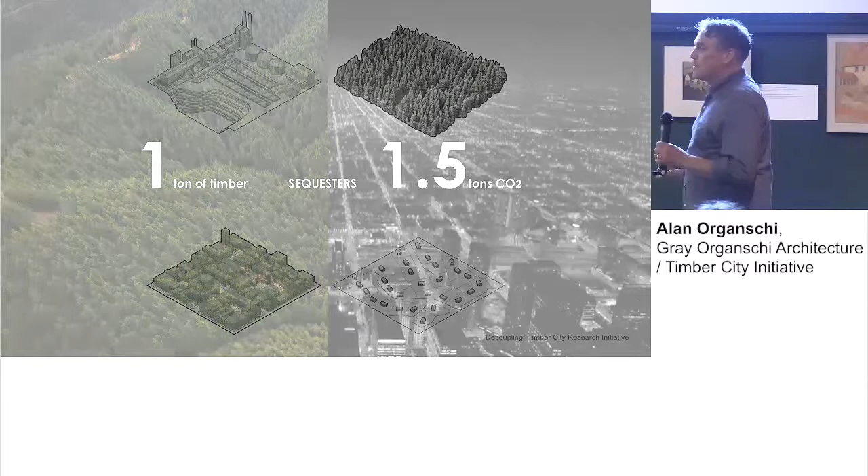What I'm interested in is the potential synergy between two landscapes which have previously been considered in conflict, the city and the forest. And the thing to remember is that forests hold carbon and cities emit carbon. And so the question is, is there some way to game forest growth, sustainable harvest, to produce cities made of wood? And moreover, to try to disconnect from a building technological and industrial perspective two landscapes which are linked.

The mineral extractive landscape, which produces steel and concrete, is linked to very efficient footprints, urban aggregations, urban building morphologies. And the forest, unfortunately, despite its incredible rich material range, is linked to a low-rise, low structural demand, suburban morphology. So how do we break that?

And what I'd like to propose is that we break it through regenerative architecture, and in particular, a regionally regenerative architecture which cuts down on potential transport costs, which uses the feedback mechanisms of people living in forests or near forests to know if they're being over-harvested, potentially deforested. We've lost that connection. We talked a lot about that today at the World Circular Economy Forum, how people aren't paying enough attention to their natural surroundings, or I guess disturbed natural surroundings, which is most of the world.

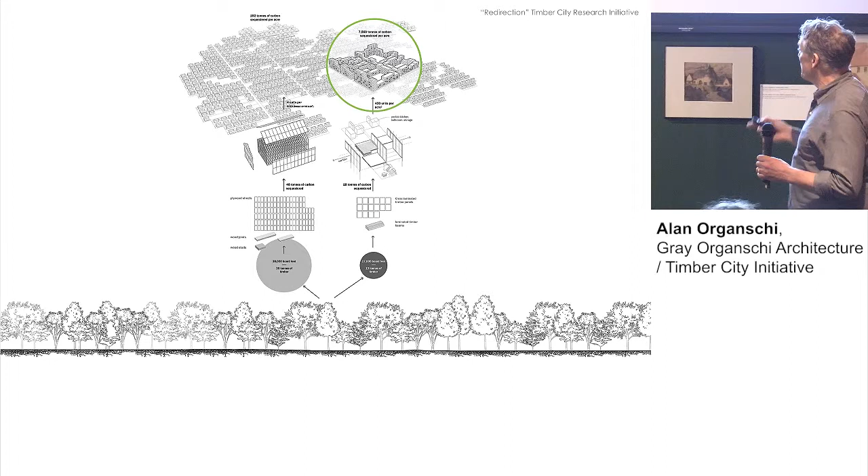So the question really today is, how do we move from this low-rise suburban morphology, which is in America, suburbia, and it's one of America's greatest exports, or at least most durable exports around the world. We build suburban morphologies. How do we shift that material into new forms of building, which the Europeans have adopted much earlier than the Americans and the Canadians, but we're trying to catch up, and to produce high-density timber morphologies. And so I want to run this through because there's concerns about how much wood we have in the world and whether we can actually build global cities and why we would do that.

And so we ran a little kind of scenario where we took a forest stand, and we planned to do a sustainable harvest, and we planned to build out a city, a 4-block district in a city that I live in, New Haven, Connecticut. And you'll notice the comparative carbon content. And we basically ran this scenario where we made 60 plots. We cut 45, one a year, to build out the buildings based on the growth plan of the city. And we studied also the stem succession regrowth of each plot, and we calculated actually how much material was needed, and it was proved that actually the plots basically regrew, and we left quite a bit in reserve.

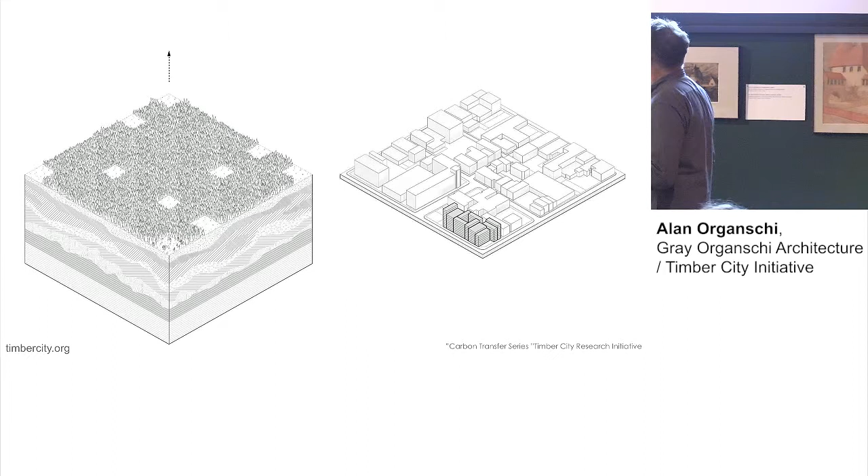And we started calculating how much carbon was actually moved out of the city. It started with how much was preserved in the forests that we didn't cut, how much was reabsorbed through the regrowth of the forests we did harvest, how much was sequestered in the buildings, and most importantly, how much was avoided when we didn't build with steel and concrete, which would have been the conventional building material for that neighborhood.

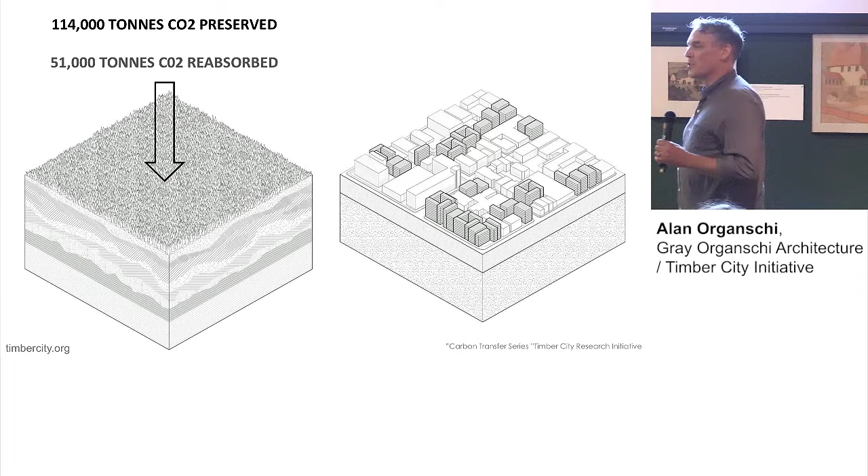And so we ended up with a total carbon bank of about 282,000 tons of CO2, which is equivalent to about 64,000 annual emissions of vehicles. And if you start calculating the current value of a ton of carbon, it's probably worth several million dollars. If you listen to Bill Nordhaus, a Nobel economist who described the potential for a carbon taxation scheme, he feels that by 2100, a ton of carbon will be worth something like $1,000.

So I'm not going to do the math for you, but suddenly we start thinking about carbon as an economic currency, and that forest is a driver of that and incentivized to grow and be protected and restored and expanded, afforested. And so that was my long-winded way of starting my lecture, The Carbon Positive City.

And so for those of you who are worried about global deforestation, I ask you to think about the fact that it actually may be a way to harvest silviculturally a lot of the forests that should be cut, obviously protecting those very biodiverse, at-risk forests in certain parts of the southern hemisphere. And in the US, for example, at 1500 AD, half of the country was covered with forests. Today, we've removed a bit of it, and we're down to 33%.

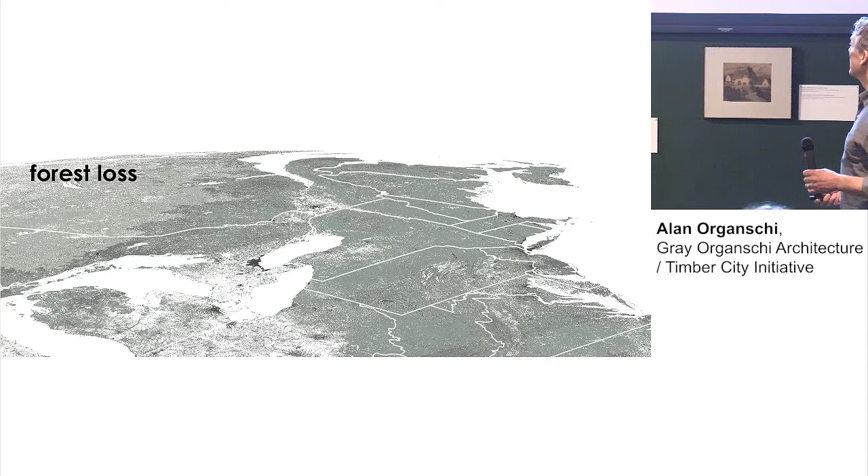But we should also start any discussion of using timber for building global cities, which will expand inevitably, by talking about what the real forces of deforestation are today. Agricultural conversion. We eat a lot of meat, unfortunately, and we need lots of pasture land. And we mine for lots of things, lots of metals. We overuse metals, actually. We know this from our circular economy friends at the Finlandia Hall. And just building itself uses a lot of forest.

And of course, climate change itself has wreaked havoc on American forests. You heard about the Camp Fire in California last year, which destroyed huge amounts of forest and released enormous amounts of carbon dioxide. But this isn't really deforestation, because you can cut forests and they regrow. But this is what happens when you strip the soils, which have quite a bit of carbon in them. In fact, in the temperate forests, about 50% of carbon in the forest is below ground. And so when you strip those valuable carbon-laden topsoils away, you get an irremediable landscape.

And we're running out of resources. We're talking about this at Finlandia Hall during the World Circular Economy Forum. We're spawning criminal syndicates that dredge illegally and collapse habitats in Southeast Asia to provide the demand for sand for concrete in India and China. And we accumulate waste, which is a problem in itself because a lot of it doesn't biodegrade, but we also remove valuable productive biomass by covering it with this, and we also cover it with other things, like cities. And we lose the value of those soils.

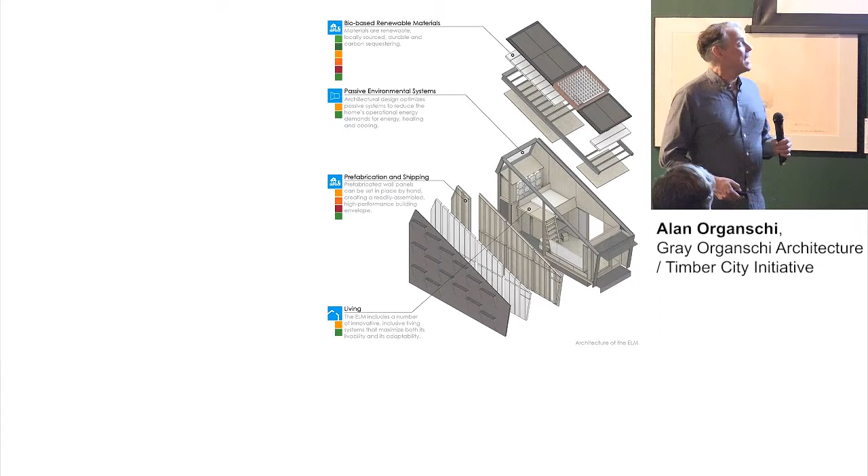Anyway, we followed all the SDGs, the Sustainable Development Goals of the UN Environment Program and Habitat, and we basically built a small building that could be trucked onto the UN Plaza. We learned later, after we'd already committed to this, that we weren't allowed to take a truck onto the UN Plaza, so that got tricky.

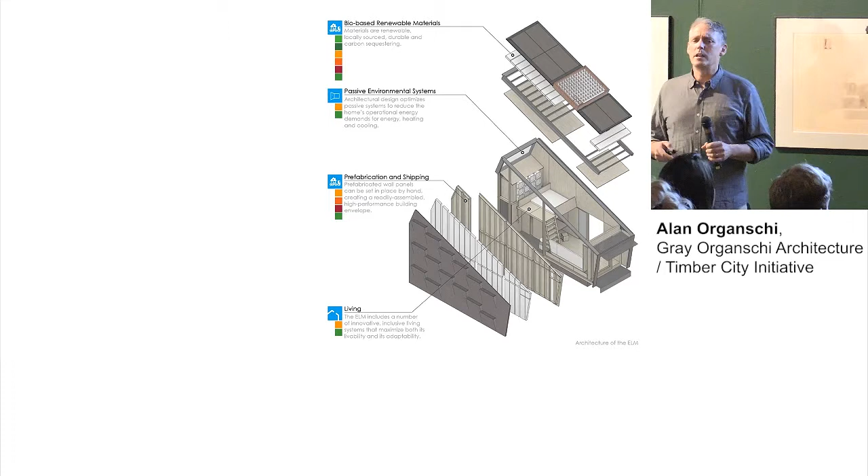But it was basically prefabricated in New Haven, and it basically housed a family of four for a peri-urban situation where there might be food insecurity, safety issues, power generation insecurity, no grids. And so we imagined that somehow it was a sort of post-apocalyptic New York. So we looked at the climate zone of New York and the material supply of New York, and we went to work.

So we basically designed for about 4 or 5 weeks, and we built for another 3 weeks. We sort of started, and in 3 days we moved it onto the UN Plaza. And I will never recover from that. Imagine taking a house, admittedly a small one, through airport security. That's kind of what it was like. My daughter, who supplied us with food, almost got arrested by the UN police.

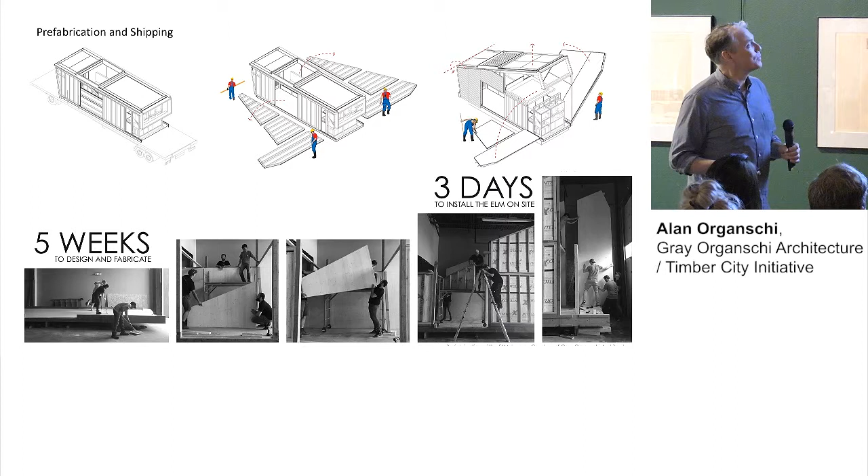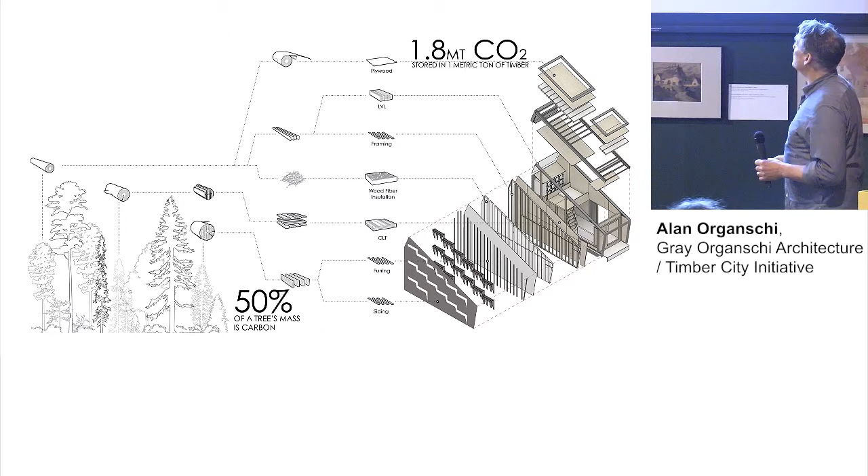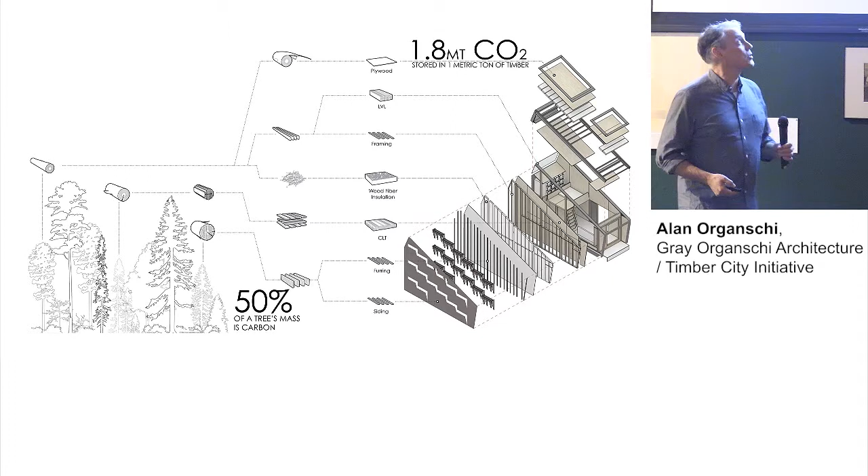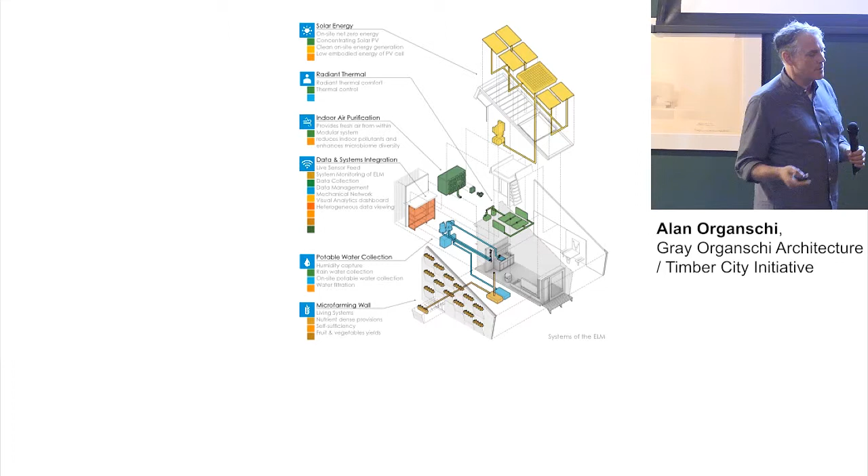And we looked at the carbon sequestration or storage of, which wasn't much, it's a small building, it's about 21 square meters. Really kind of one story with a loft. And we distributed the local material, and we looked at different systems: solar energy systems, solar generation, obviously, radiant thermal energy, indoor air purification, natural ventilation systems, potable water collection through condensation, but also through rainwater harvesting, and then finally a farming wall. And it was surprising to get it there.

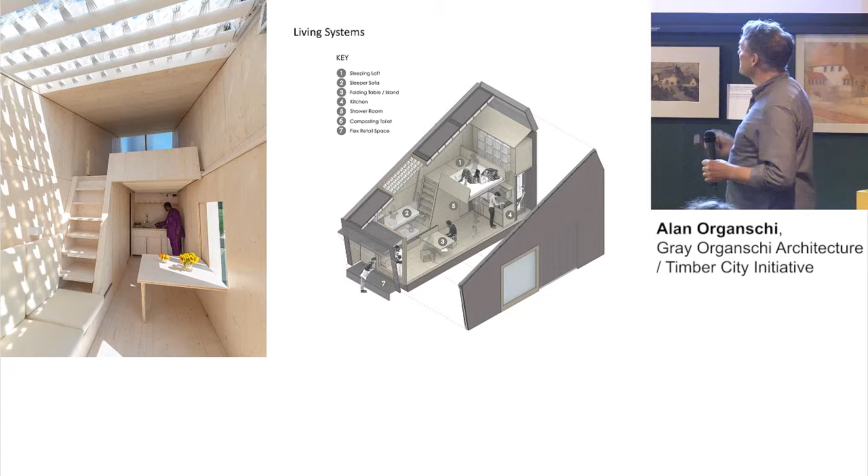I wouldn't say it's a work of craft, but it was an idea about working quickly with little time, trying to think on your feet, trying to make a decent building, a good home for somebody with a lot of options. Essentially, you can kind of see the layout, I hope, and I won't go into much detail. This is the head of the Kenyan UN Environment Program, who spent a lot of time with us. He was great, and he actually said that he wanted to move in, which was nice.

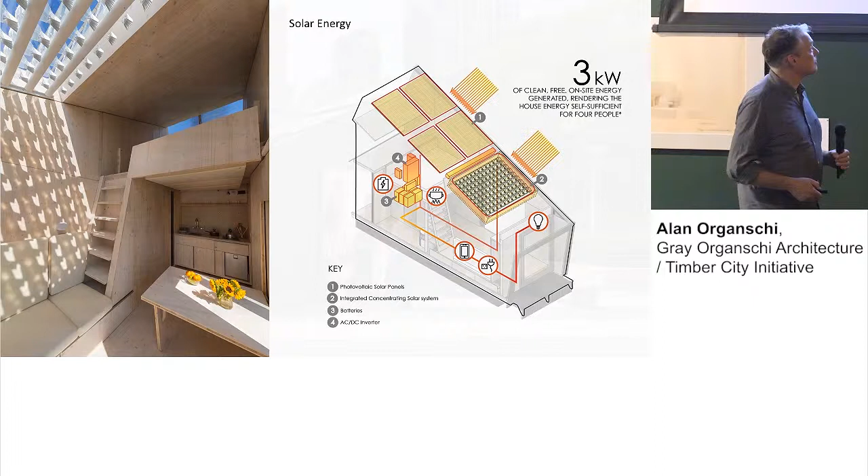And we also measured the air quality, and it turns out that wood has really high air quality once the initial VOCs have basically diffused. And this is our little mechanical room, which had 5 car batteries and could basically keep a family of 4 powered, enclosed in their house for 5 days, and produce enough water and enough electricity for that family to live, completely self-sustaining. And we used a lot of reused materials to make the sidings, and ran out and had to get new material. It was a rush.

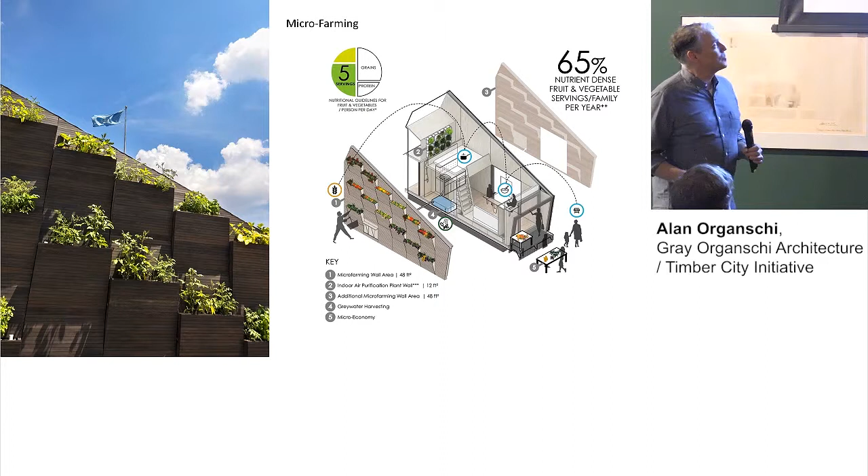And we had a team of people in my office, students. We worked with the Center for Ecosystems in Architecture to develop the systems, and we made the plant wall and grew plants in that for over 2 months, and basically produced a pretty decent amount of nutrients. And it was a hit, because people in New York don't expect to find a house on the UN Plaza, and they liked it a lot. And this is the Deputy Secretary of the UN tasting basil and eating tomatoes, not the green ones.

And so it was a good lesson in thinking more broadly about how buildings should perform, both how they operate and how they protect people and provide them with services, but also how they should use materials from this increasingly resource-deprived planet. And so we thought about scaling up. And in scaling up, I like to think of a sort of design spirit guide, Charles and Ray Eames. My partner Lisa Gray and I have worked together since we got out of graduate school, and we wish we could collaborate like Charles and Ray Eames, the great furniture designers and filmmakers.

And I love this piece of art. It's a laminated double curvature sculpture, which I would love to have on my wall and own, but can't afford now. But when we add to the aesthetic program of this beautiful piece of sculpture, and we learn that it was a leg splint designed for injured soldiers in the Second World War, it changes our view of what that aesthetic is. It makes it more, for me, meaningful. Kant called that contingent beauty. And I think the idea of contingent beauty is something that we're wrestling with a lot, because of course we want to make beautiful buildings, but we want to do no damage to the environment, and that's the goal.

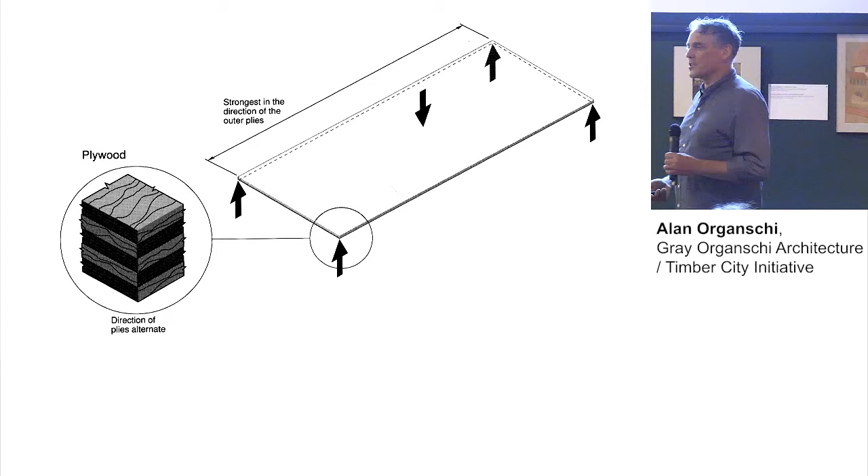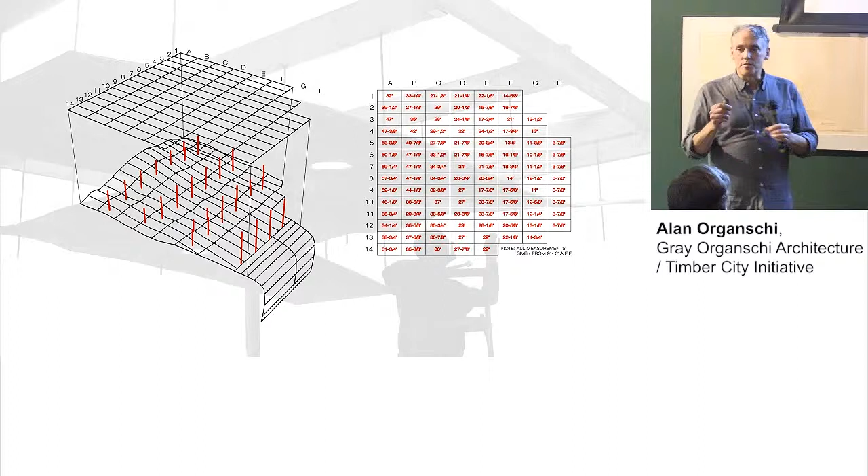And so we studied the idea of stiffness in a project, which we did in the late 90s, renovation of an old firehouse for an acoustical music studio. And we bought a bunch of plywood, and we tried to see how far we could bend it in 2 directions. How stiff would it be? And we created an acoustical shell, and we modeled it physically, testing it using different techniques of sort of tuned wood mock-ups. We measured it and gave it to a Swiss acoustical engineer who promptly wrote back and said, I can't model this, it's too complex.

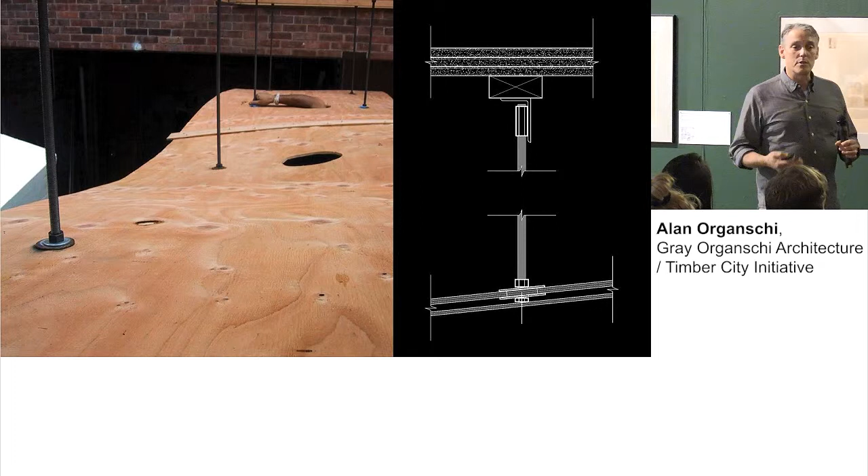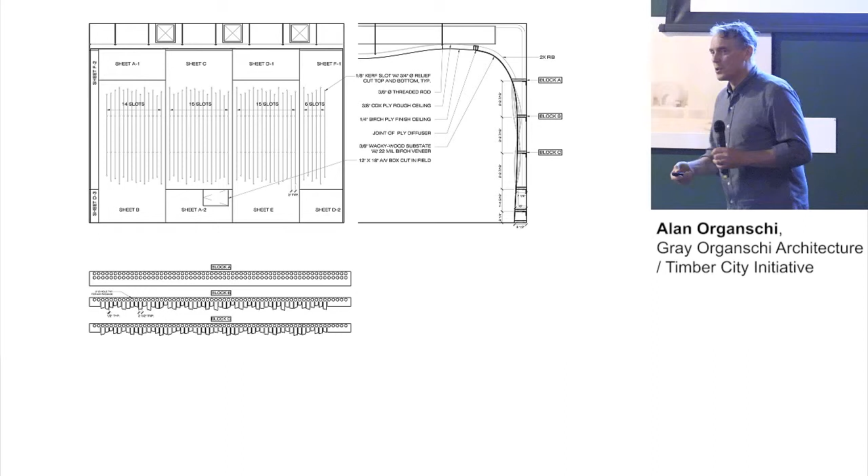And so we essentially used these different threaded rod systems to produce an acoustical shell that was acoustically dead for a recording studio and very live for performance, and that was a kind of complex design process. And we designed an acoustical diffuser at the stage to produce these sort of vanes which twisted and warped to diffuse sound for the musicians, and also to serve as an air return duct.

And we stole a little detail from one of Charles and Ray Eames' furniture patterns, which was this relieving cut where we cut a circle out of the end of a kerf cut, saw cut, because we found that when we were warping that, it split. But when we could expand the tensile area around a larger surface area, it wouldn't split. And that became a kind of motif.

And the room seats about 70 people, and a crush, and the piano you can hear. It's incredible how live, how rich wood is, and we know it's a great instrument material. And here was a big room that was an instrument. You can hear the hammers on the piano coming down before it hits the string.

And it's so incredible. And we were renovating this firehouse, which had been abandoned, and we were able to, through the brilliance of our client, Nick Lloyd, who runs a record label there, produce essentially a home for himself and his wife, who's a painter, and then their children, and a bar in the basement, and the recording studio, and the record label, and visiting musicians started coming, and it was really successful because of his vision. And he lived in this amazing sort of relic of 19th century New Haven industrial space.

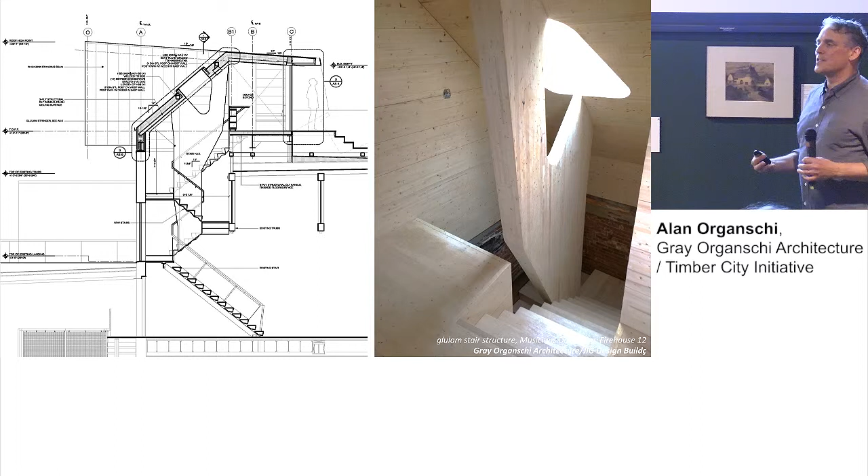And he asked us, once he decided that he was going to house visiting musicians instead of making them pay exorbitant hotel prices in New Haven while they were visiting, to build a dormitory with 3 bedrooms on top of the building. And we quickly found out that the building couldn't support it, because it was an unreinforced masonry building. And so we chose to use mass timber, cross-laminated timber and glulam, to stiffen the building with a light structural material that would essentially keep the building up under the load that it held.

So we have a stairway up into a hallway with a little seating area for musicians to play, 3 bedrooms and a little bathroom and a WC. And it's sort of created this new urban lawn on the roofs, and it's created more density. And the real discovery was we could plop this building down on top of an unreinforced brick building built 100 years earlier.

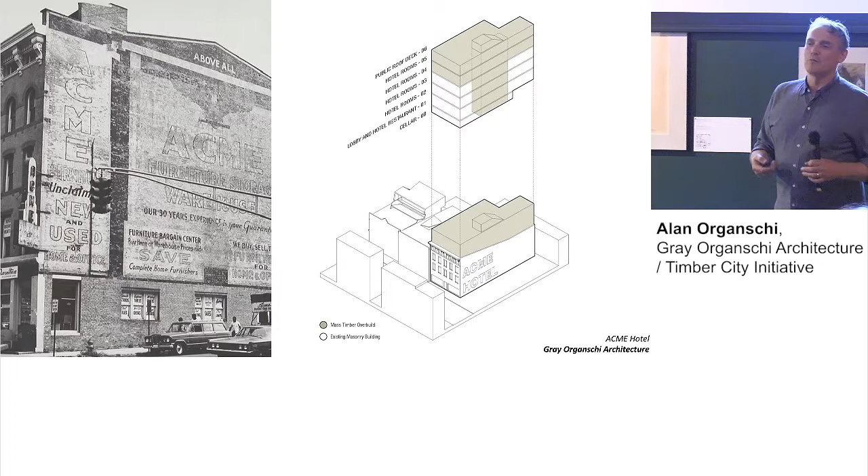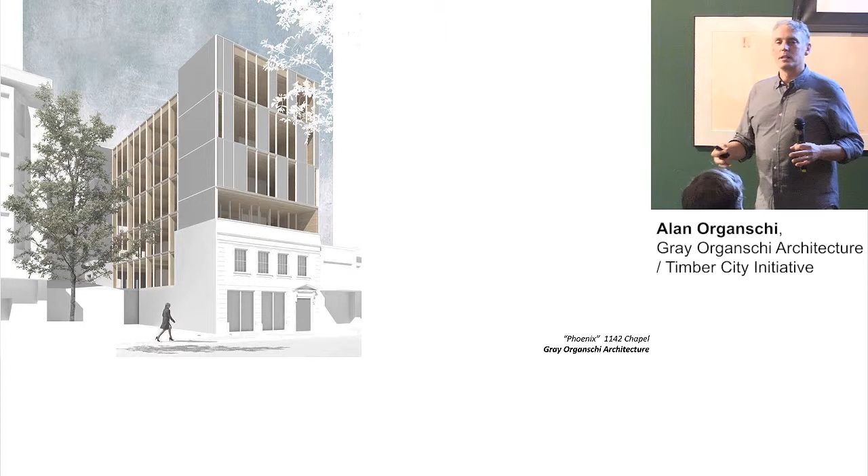And so a developer contacted us and said, I want to add 2 stories to the other building next door. And we designed a sort of restraining system using cross-laminated timber cores to produce a hotel 2 buildings down. And then another developer called us and we designed another building, and I won't go into the details, but suddenly the city economic development coordinator was saying, oh my God, we can actually get more density in our city using wood because we can't do it with steel, it's too heavy, or concrete. So this is a great model, and we'd like to pursue it.

And that brought us to a kind of idea about this notion of structural biomass. Like, why aren't we using this great plant material that's so abundant and so photosynthetically productive? It provides so many ecosystem services. Why aren't we using it for our buildings? Because we know that it will regrow, it will regenerate. We've been talking about renewable materials for 60 years. And so we began to study different scales of using just round wood to produce structure.

And that reminds me of a kind of funny story. We were having dinner with the rector, and we had a really nice bottle of wine while we were talking about the design. And another visitor who was a lay person, after this sumptuous meal, said, man, if you guys do celibacy like you do poverty, sign me up.

Anyway, the building is a lot of wood. We designed it as a wood structure. The university that sponsored the building decided that it wanted to do a LEED platinum building, and we learned that you get more credits for recycled steel, despite the enormous smelting energies that go into steel recycling, than you do for a wood structure, because wood was essentially politically knocked out of LEED for quite a while. Recently it's been reintegrated through a material credit. And so we made a steel building and we used as much wood as we could.

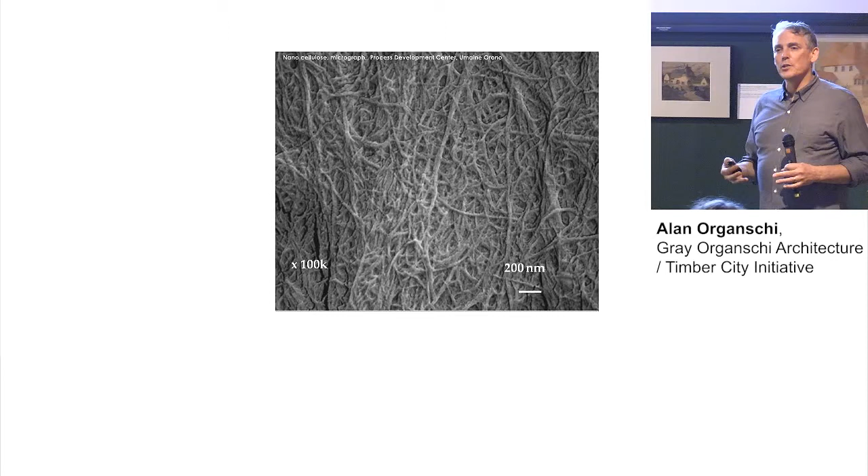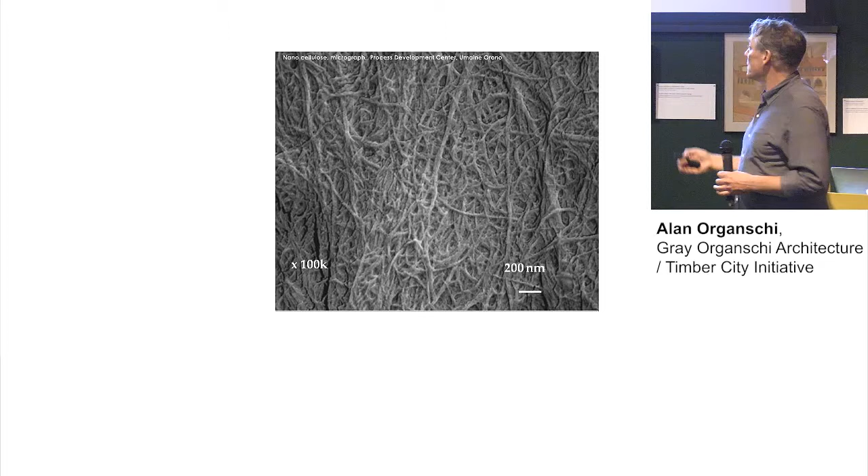And we went to work thinking about all of the different things that are going on around the world, inventions, the sort of revolution in bio-based materials, biogenic materials, which is happening right here in Helsinki at VTT, or across the Atlantic at the University of Maine in Orono, which found a way to mechanically produce nanocellulose and are pressing panels out of it, or the work by the folks at the TU in Munich on cellular nanostructural modification of cell walls using polymers and mineralization to create greater rot resistance and fire resistance and all these kinds of exciting things, and these different techniques of adhering wood. We're even starting to look at lignin-based glue so that we're not actually using fossil hydrocarbons to make glue.

And then Achim Menges' work at the Institute for Computational Design, where he's looking at the natural hygroscopicity, the water-loving character of wood, and how it can change to produce apertures activated by moisture changes. But I like the dumb stuff. I like the stuff that's ready at hand that we're making. We've been making glulam beams for a century. We've been making CLT for 25 years. Petra, you can correct me on that, but it's been decades, let's say, we've been doing this stuff.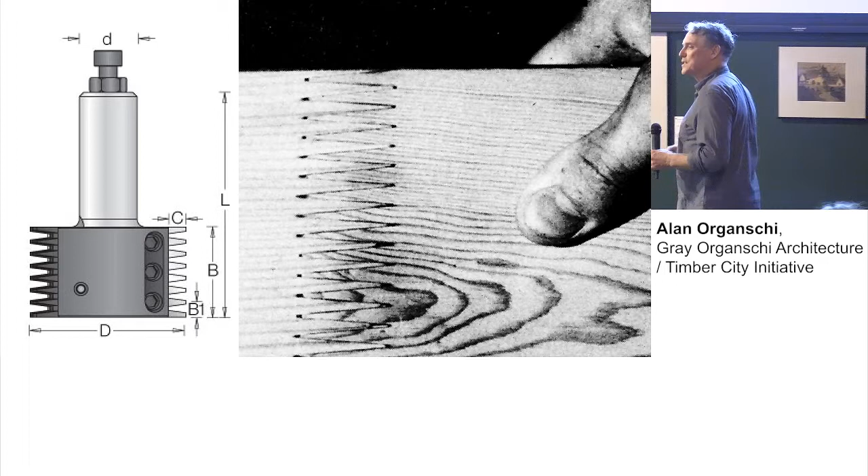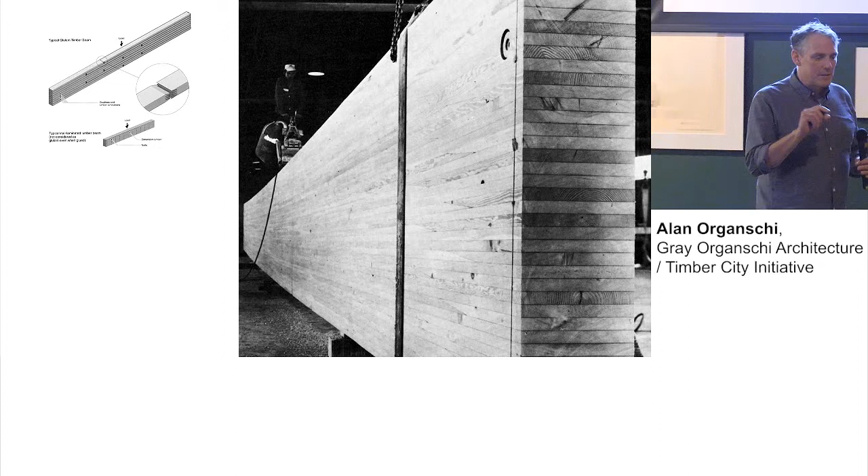And really the tool is a finger joiner to make long sticks and glue to laminate the sticks together to produce massive members with enormous capacity. And now we're only realizing that we can use them in the way we used heavy timber industrially in the 19th century. It's fire resistive. And it already knows how to manipulate the different quality of fiber that comes out of the forest by putting the best stuff along the structurally most demanding edge, the tension edge, the second best stuff along the compression edge in a beam, and then you can load the cheaper stuff in the middle, which means you're using more of the forest that you cut.

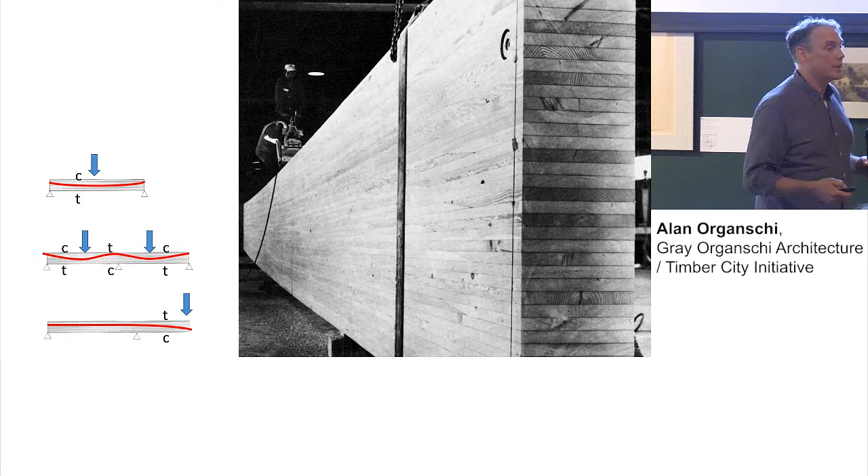And I think we haven't yet fully understood all of the potential of that capacity that we've been using for years, creating different kinds of structural configurations. And this is an example at Blumer Lehmann in Switzerland, a 5-story building where the architects and the manufacturing company recognized that they were using a lot of spruce, which is a wonderful structural wood, but there's a lot of beech growing in European forests, and so how could they use beech? And they made laminated veneer lumber, bearing plates, and laminated veneer beech dowels to produce a 5-story building that had no steel.

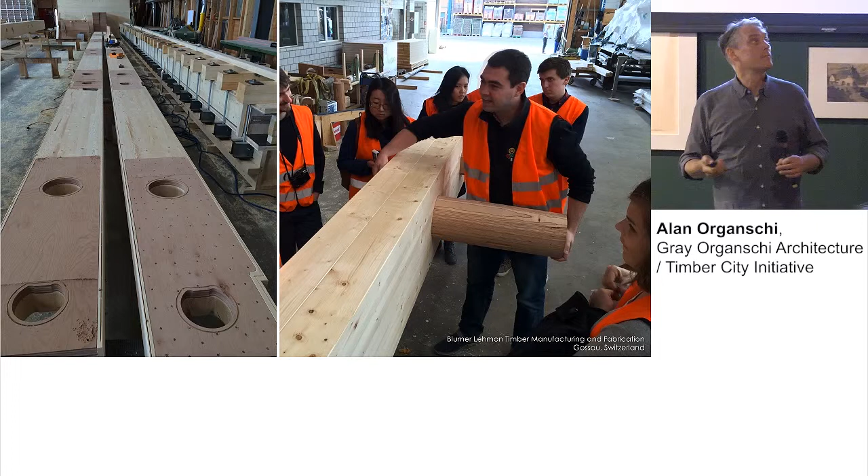And so we started making lots of buildings out of curvy glulams because we liked the shapes, and we made houses out of it, and I think our clients tolerated it. And we misunderstood certain kinds of things aesthetically because we liked the shape of this beam lying on the ground before it was put up.

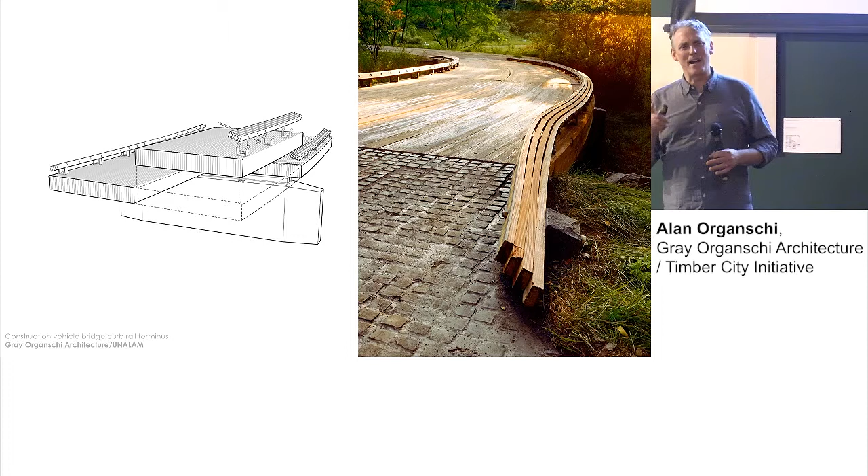And so we made a bridge out of it and sort of gained the capacity of the manufacturer to produce a construction bridge that is a 10-ton, US ton capacity bridge, which we watched a 30-ton truck drive over, which was very interesting. But what happened was it kind of sprung back into shape, and we thought, oh, wood actually is resilient structurally. And so we made a number of bridges.

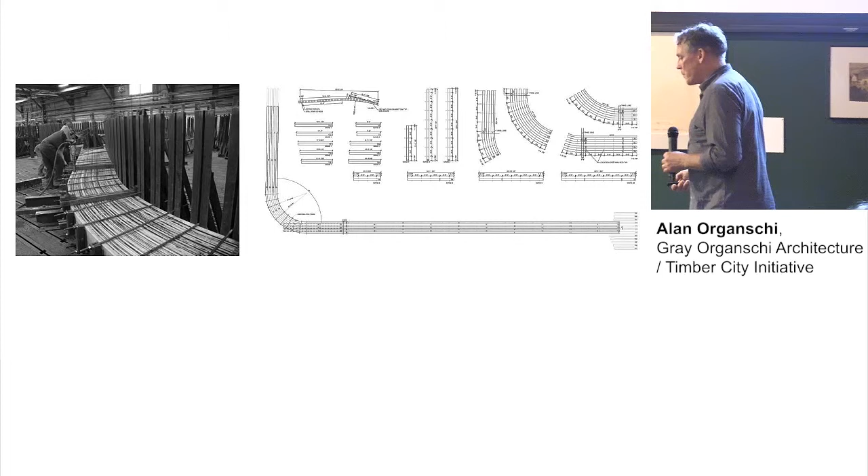And I'll move through this quickly. It's a kind of passion of ours. We get asked to make bridges because people think wood bridges should be in woods. It's the, I don't know, correlation that people seem to like. And we really worked with our partners as glue laminators to produce essentially treated bridge systems.

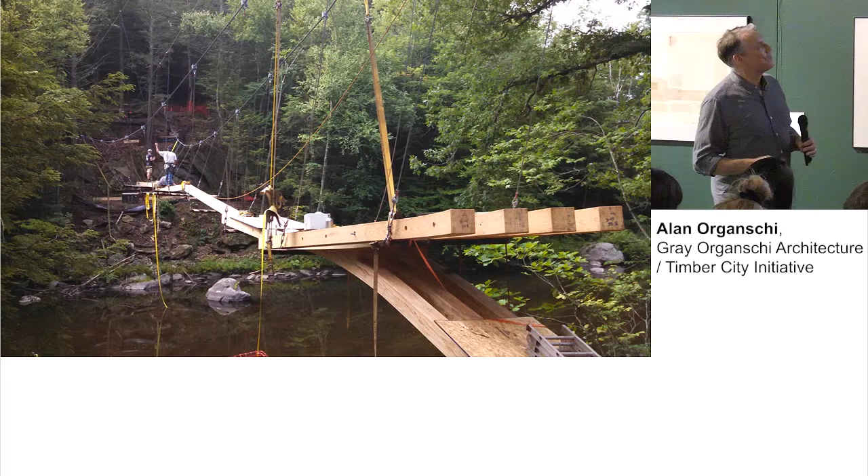And we made our first suspension bridge a few years ago, and it was a challenge. Our company, Jig Design Build, rigged it. We have one of the builders here in the audience. But we got it straightened out, and we made this bridge named after Henry David Thoreau, one of the pioneer environmentalists in the US. And people use it, and they love it, and I think they love it because it's not made of plastic like a number of the other bridges up and down the river.

And it's made of solid, thick material, which, because there are not a lot of little joints, it's more resilient. It lasts longer. It's more durable. So mass timber has a lot of possibilities.

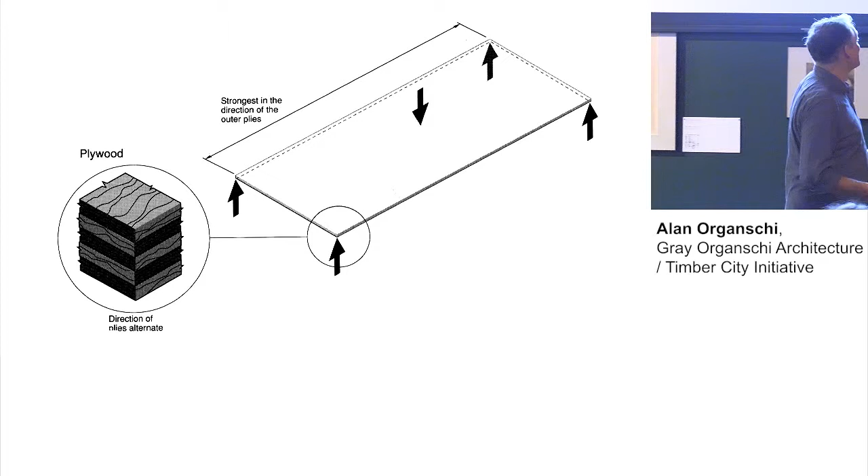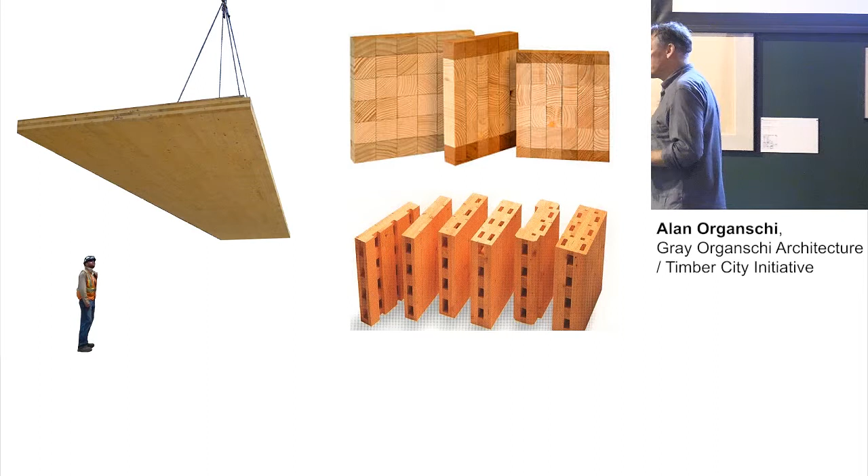And then, you know, the CLT revolution comes along, and the Americans figured it out, I don't know, like 18 months ago, it feels like. Meanwhile, Stora Enso and KLH and a lot of European manufacturers have perfected it and can still beat the pricing of American CLT manufacturers. And they just stole the idea of plywood, transverse lamination, and they produced it with sticks, as you all know. And you can produce all kinds of fascinating configurations. These slides are so outdated now, given what's available. I need to get on the stick and find some new pictures.

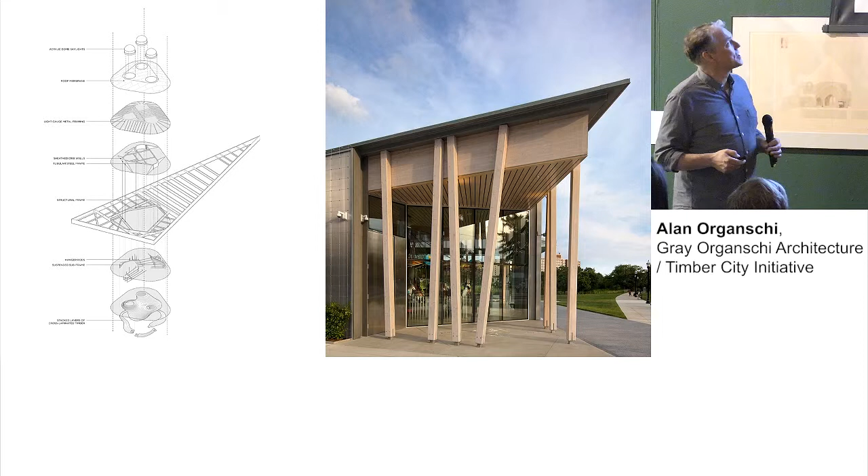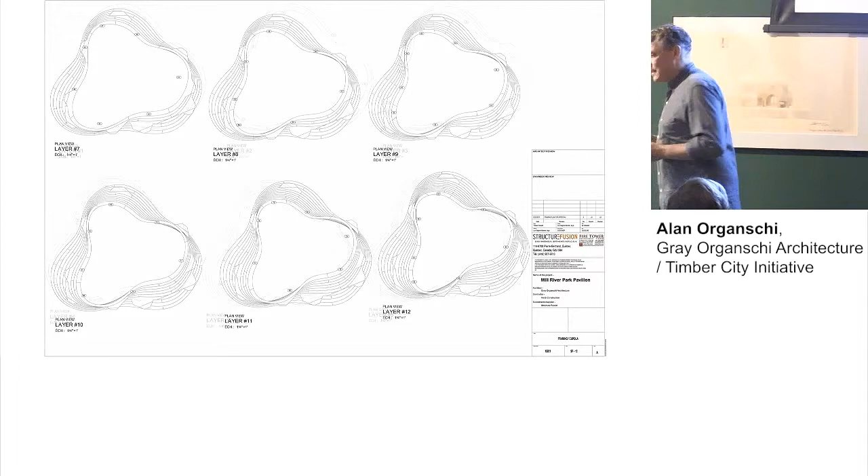And we had a great fabricator in Quebec who worked with some Belgian and Austrian and French fabricators to produce this cupola made out of a kind of topography of cross-laminated timber, which had 3 skylights and which sort of spun and rotated in the opposite direction of the merry-go-round. And it's the kind of thing that shows you that wood, because of the manufacturing capacities it allows, is so amenable to digital kinds of fabrication that it's easy to build something like that in a factory, off-site, ship it, and with a precision to be able to produce this in a matter of days.

A fabrication project done in a factory, but assembled by steel riggers, because the company Canam, which is the largest steel manufacturer in North America, has bought a timber fabrication company as a kind of climate change scenario, because they know that wood is going to be the thing of the future, and they know that their guys know how to lift really big pieces of material high in the air with cranes.

And so we made this and built this building, and it took a long time to convince anyone in the city of Stamford, Connecticut, which is a city of about 200,000 greater metro area, to build this for the kids. It's a public merry-go-round. It costs 25 cents to ride on, and they ride around, and I look up and I get a little seasick, but the kids seem to like it.

So here we are. We've been experimenting with making wood in the city in kind of little stabs. Meanwhile, our friends in Vancouver and Austria are building multi-story, huge buildings out of timber, and we're playing around with 1-story event spaces. But what was interesting to us as we watched the proliferation of wood architecture was the sort of molecular aspect of wood.

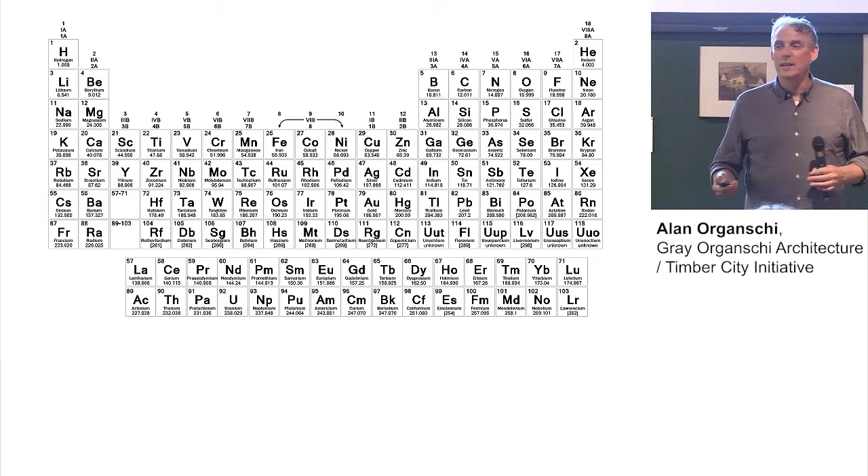And if you think about the throwaway culture of cell phones and you start applying it to building, it gets a little scary. So we could talk about all the buildings, all the materials that go into building, but I'd like to talk about carbon because that's the subject of my talk.

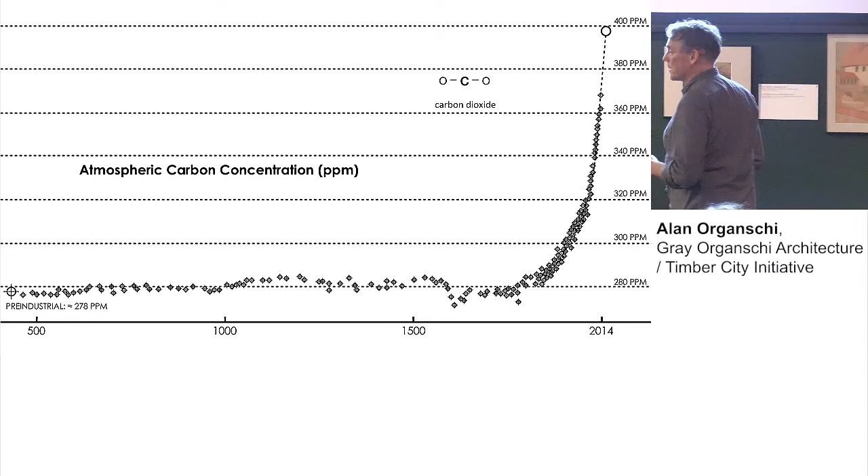And we've seen since the Industrial Revolution a sudden spike in carbon concentration. And not surprisingly, if you also map global population against carbon concentration, you'll see that it's coupled. And that's the thing that people in the industrial ecology world and environmental world are worried about, because that means that when we consume as a species, not just because we breathe, because we make a lot of stuff, we're makers, homo faber, we emit carbon. And that correlation is very strong.

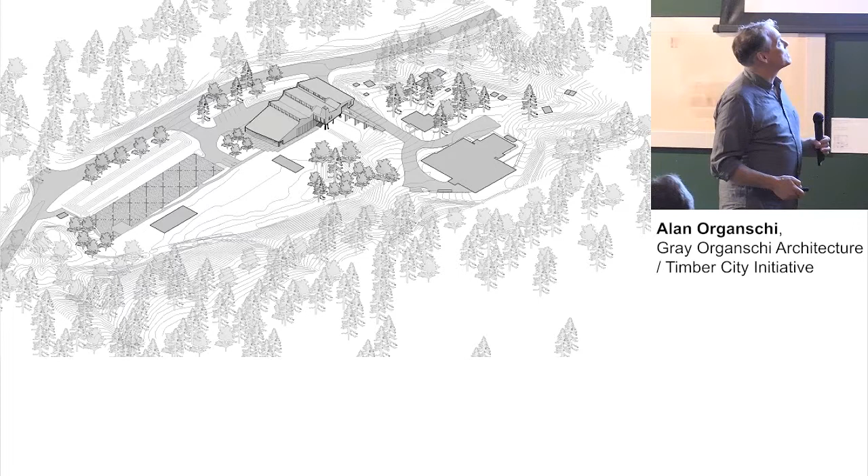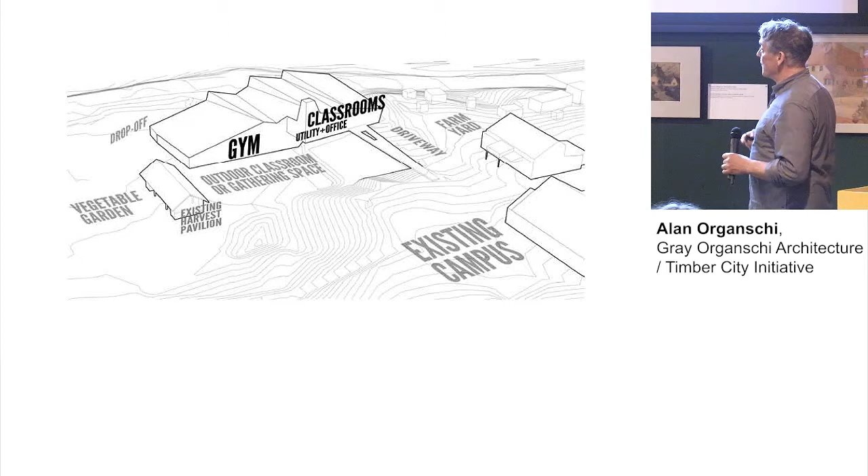And so we designed a classroom building which had a gym. They could only afford a half gym, art classrooms, 2 science classrooms, offices, and that it would create a new space of entry for the school because they were perched on a hillside. And so we used the building to navigate that sectional change.

And it's fairly simple. I won't go into too much detail, but just to give you a little reference, the building has this half basketball court, which also serves as a gymnasium and a rec space and a theater. And then most of the offices and bathrooms are downstairs, and then upstairs are classrooms, which each look into different areas.

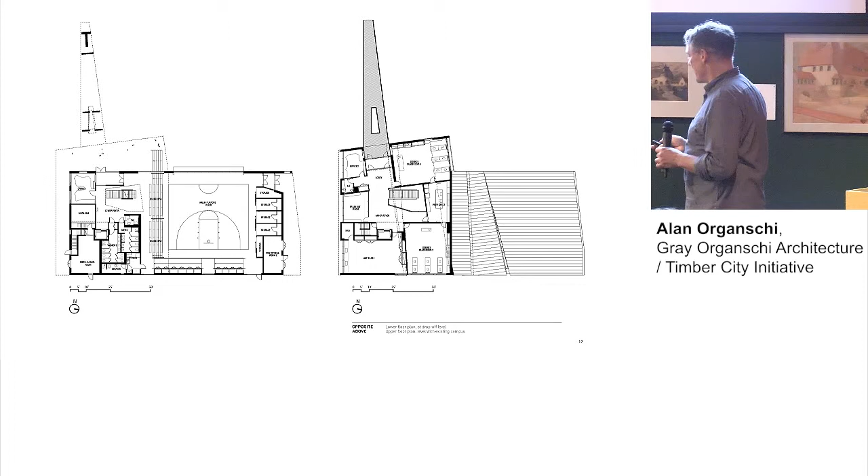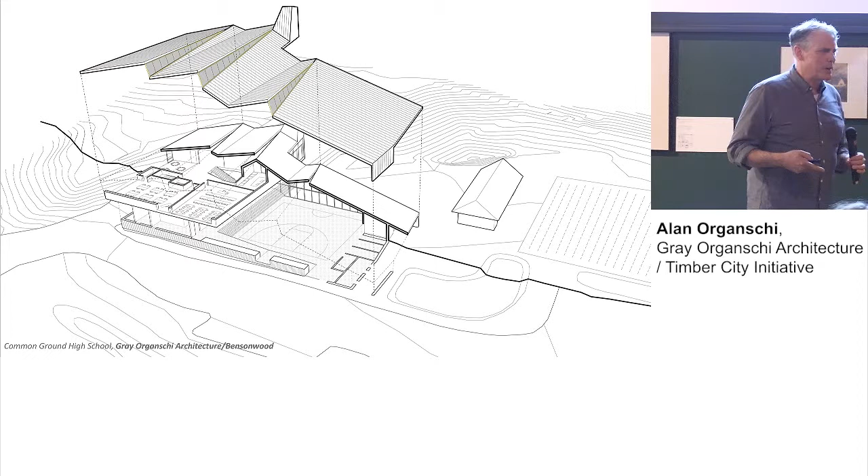And we decided that we're going to throw everything at this building. The roof was going to become a really important element in the building. It was going to allow, obviously, natural daylight to reduce electrical illumination costs. It was going to be super, super insulated and airtight so that we could optimize our thermal performance. We lined it on the south. The roof pitches optimize the angle for solar photovoltaic arrays, which would power the geothermal pumps that ran the school.

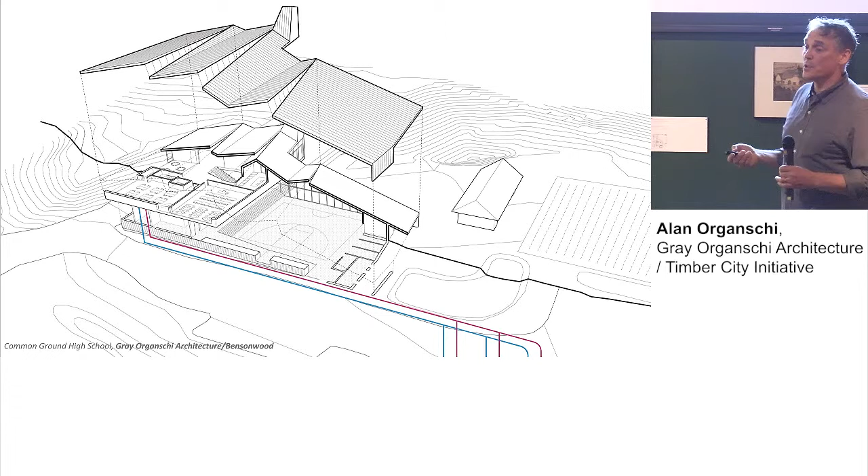I mean, it's really hard. American school systems are a wreck. So the idea that a public charter school could get the bond issued to produce the school was a big deal, and it was really a tribute to the administrative team. They were incredible, and we've got all this stuff in there, and we developed bioremediation pools and artificial wetlands, which became outdoor classrooms.

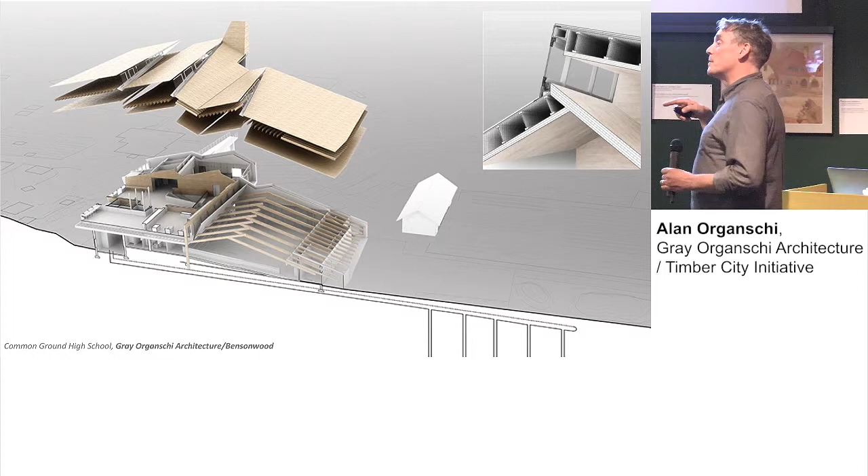But we argued that the thing that would be the most beneficial was to use regionally harvested wood to build the building and to use it as densely as possible and to use these new technologies that would allow the structure to be the finish as well as the structure, that we wouldn't have to cover it up.

And so we looked at black spruce from Canada, not too far away from us, about 580 miles, and a manufacturing company that was using this black spruce that grows in little thin strips, 8 inches in diameter maximum, very tiny. No one in their right mind would harvest a piece of wood like that. But that's where they work, and they figured out really wonderful lamination systems.

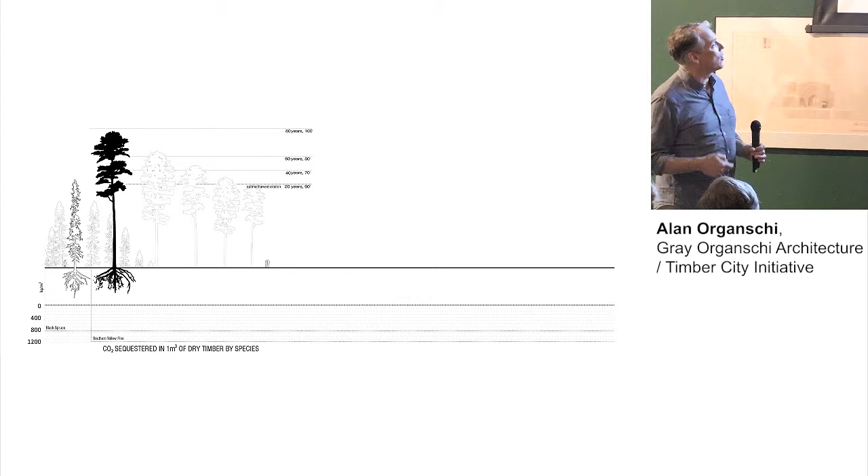And we studied how long it would take to optimize growth, how to optimize carbon sequestration in the forest, when we should harvest it, how much carbon would be stored for all the species that went into the building. And then we began a kind of transfer of that material conceptually through all of the different products that we were using, from finishes to structural components, into the building, and we tracked exactly how much carbon would go in and through the forest. So this is what we are calling the carbon transect.

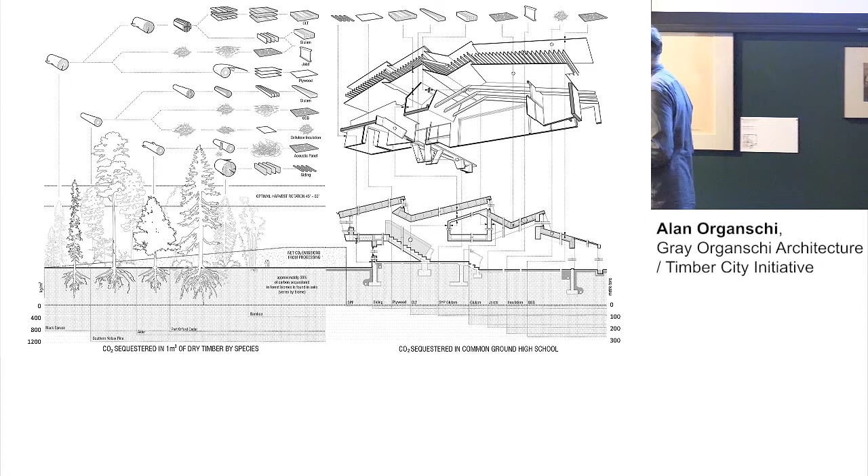We measure off that line. This is the stored carbon. This is the emitted carbon during production and transport, and this is the carbon that gets stored through the body of the building. So we learned we get to store quite a bit of carbon. And we took into account the fact that the material was manufactured in Quebec, produced in Walpole, New Hampshire, and then shipped to New Haven.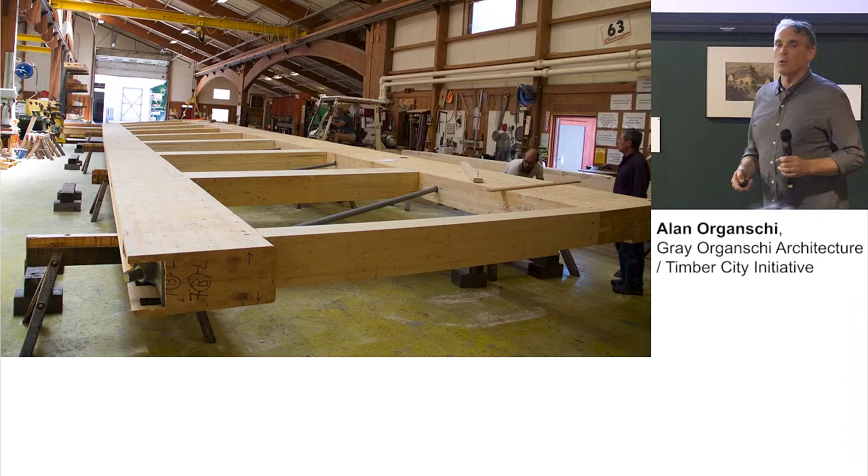And this is the story of the construction. 5 guys and a crane. The whole assembly was put together in 2 weeks. And then the sidings went on, and we learned that there's a whole way of getting more advantage, to optimize more the prefabrication, which we would do next time.

And the building now functions for 220 high school students and 15,000 New Haven residents every year through different kinds of programs, camp and farming programs. And the building is made out of wood. This is a glue laminated bridge which replaces what would have been a concrete egress stair. And we have a little bit of steel in there because when architects like to make things very thin, wood might not be able to do that.

And the building is lined with cross-laminated timber. It's really an industrial product. As if there were an exposed brick wall, we would love it, right? But wood structure, people don't think about so much. These are just big plates of wood that reflect light beautifully, treated very cheaply for this rather resource-deprived school.

And all the sort of public circulation spaces are made out of wood, cellulose fiber, and there's some concrete in here too. We'll be talking about that. It's really interesting. When we finished the school and we wandered around and the kids were talking about all the ecological principles that went into it, we would ask them, what do you like most about the school? Hoping that they would say, oh, the daylight is beautiful. Oh, we love the shapes. The roof shape is so cool. To the one, they said that they thought the buildings smelled good.

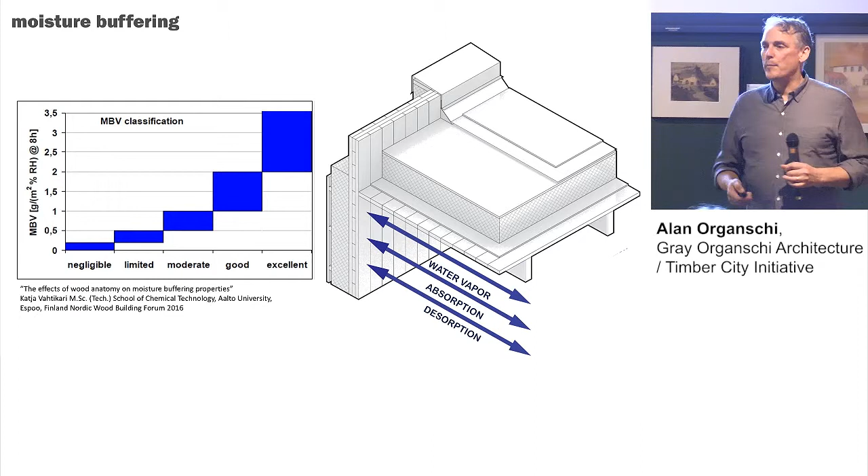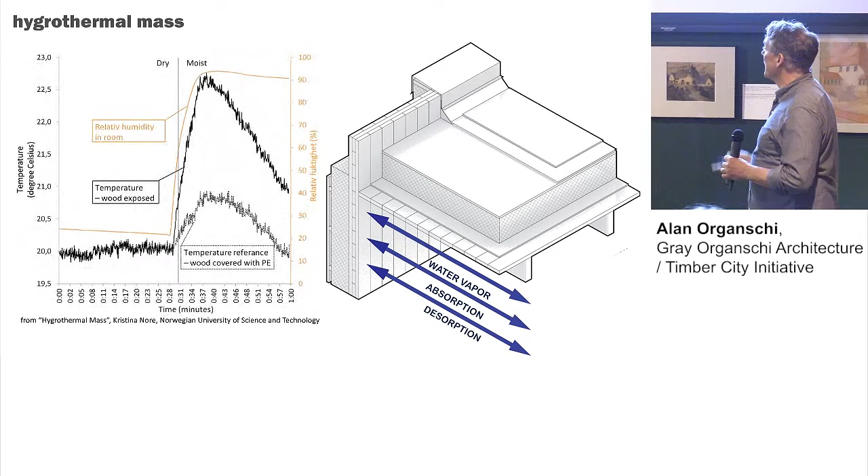And we've also learned that with this property comes a phase change from vapor to liquid in the cells of wood, and that may have energy implications, so-called hygrothermal mass, which is just being studied here in Aalto University and other places at the Norwegian University of Science and Technology. Kristina Nore is a colleague.

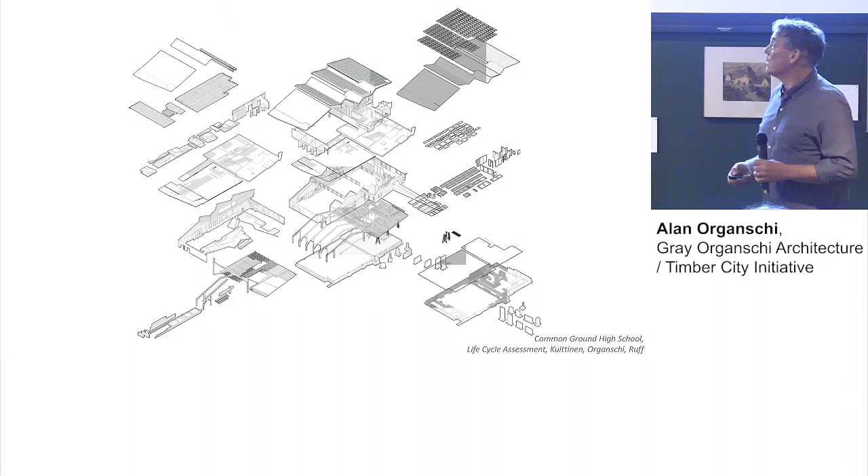But what we decided to do was, with the help of Matti Kuittinen, is essentially conceptually take the building apart to try to understand what its impacts really are. And so through this carbon book project that Matti and Pekka and a colleague of mine in the US are working on, we started studying actually the impacts of the building. And we looked at what elements in specific were emitting carbon, and Matti will talk more about this and with much more insight than I can offer.

And it's, as you'd expect, metal elements require a lot of heat for formation. Site and groundworks can just disturb a lot of soil, and we pave things, so we lose carbon that way. And concrete foundations are a big producer of emissions. But if you look at storage, now it shows a different picture. These offsets start to become really valuable because the wood material and also the plantings and the new very productive soils that we tried to protect with the farmland and with the wetlands actually can store carbon.

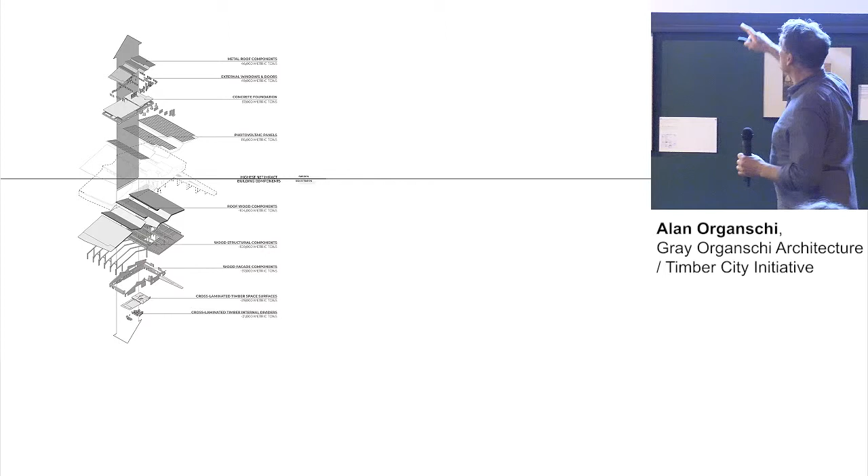And so we made this sort of monstrous drawing, which is everything below the line stores carbon, everything above the line emits carbon, and if it's bigger, it stores more carbon. It's one of those useless drawings that architects like to make. I like it a lot. But it's really a way of saying that there's a monstrous condition happening, which is that we can store and emit carbon at our will. And that at our will is a really important part of this discussion.

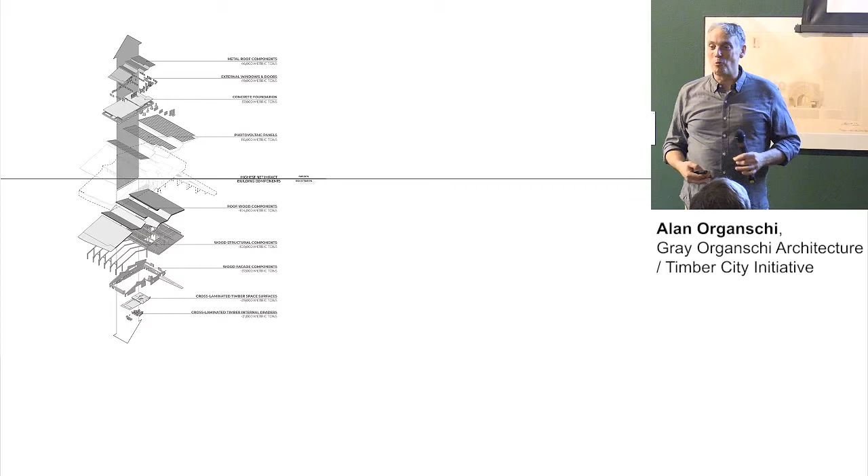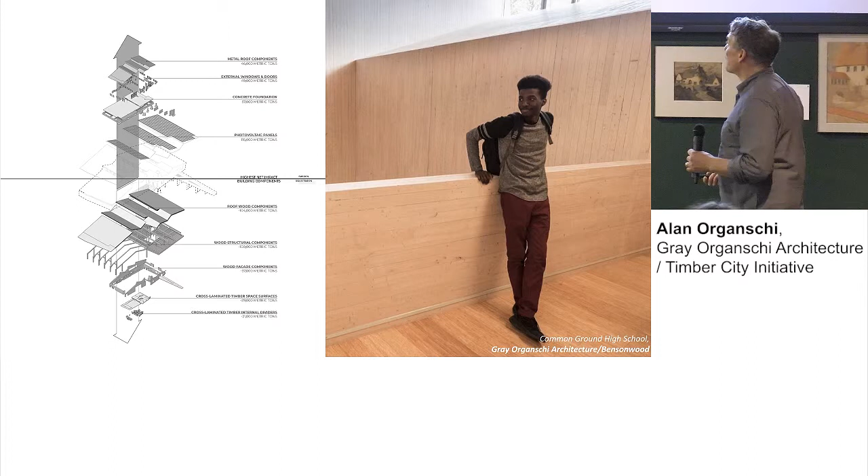And this young guy worked on a study with us. He took our building information model, we taught him how to do it, and he quantified all of the material, and he counted up all the weight of the wood in the building, and he learned that there was 450 metric tons of carbon dioxide stored in the building, which is worth 100 cars' annual emissions, which is a great project-based educational opportunity for kids. I think he's going to be a major scientist. This guy was amazing.

And that brings me to really the end of what I want to talk about, which is this idea of bioeconomic building scaled up to some of the themes, and this relationship we talked about. And I quote Lionel Robbins, who is the founder of the London School of Economics and who defined economics as a science which studies human behavior as a relationship between ends and scarce means and alternative uses. And that's what we're talking about today as a planet.

And so we took our common ground model and we started studying exactly how much carbon we could store, how often we could replenish a harvested forest cut, how to move those forests of different species through our commercial products that are available right now into buildings.

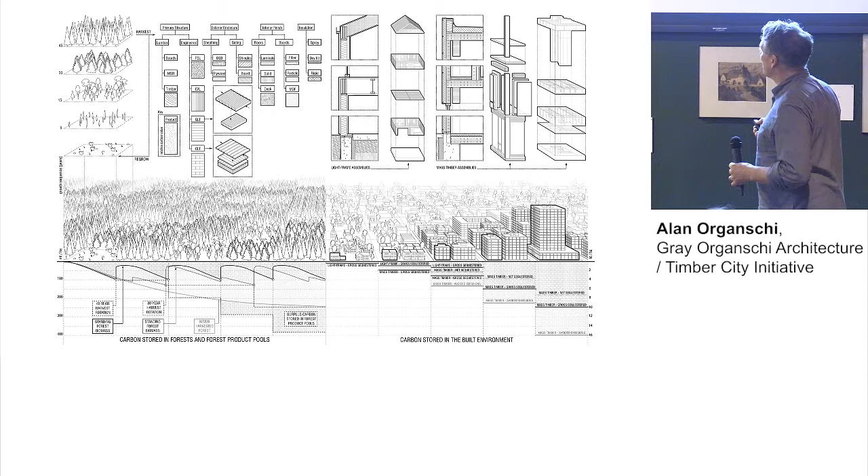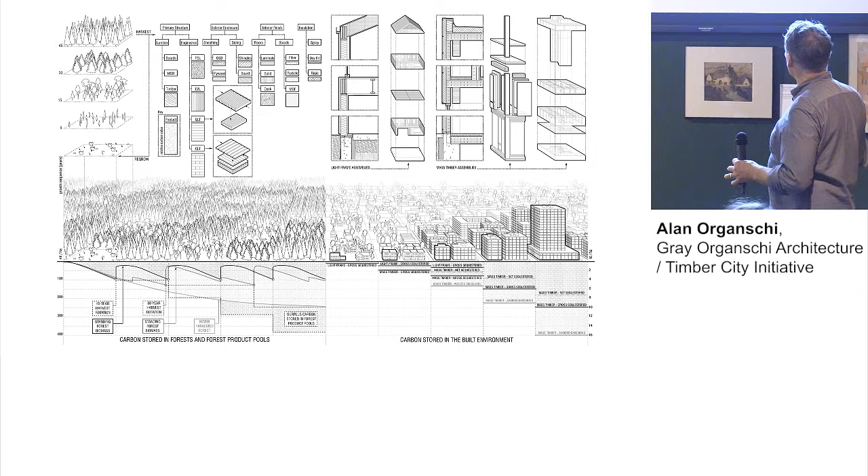And this is what happens if you don't let the logs lie in the forest and rot, but you actually use them productively. Again, I'm showing my technological bias, so forgive me. This is what's stored as we shift this material into these large urban buildings. And so we thought, okay, what would happen?

And this is just a thought exercise, so forgive me, but we actually did a paper called Building a Global Carbon Sink with a group of European scientists and some American scientists. And we basically tried to imagine how much wood we would need to build all the buildings required to house the new global population explosion, the next 2 billion people who are going to inhabit the Earth.

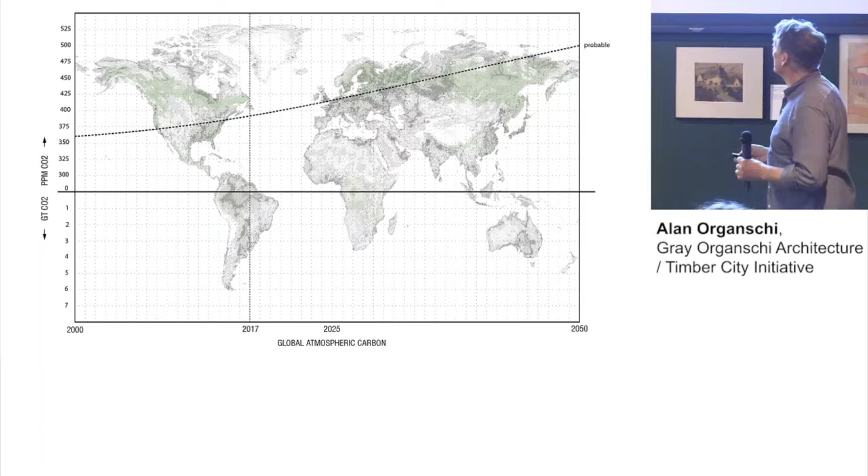And this, again, is a carbon transect. Below it is carbon absorbed and stored. Above it is carbon emitted. This is already out of date. This was drawn in 2017. We've surpassed 400 parts per million in the atmosphere, which is 50 parts per million above what is considered a sustainable density.

And that's the 2-degree that we came up with, the 2-degree temperature rise, which has now been revised by the SR15 IPCC report to 1.5 degrees so that we can save some of the Pacific Island nations from being over inundated with seawater.

And then we looked at how much carbon could be sequestered if we built all the new, just buildings, occupied buildings, not infrastructure. And it was an estimate, of course, and we learned we could, basically within a range, store about 5 gigatons of carbon in the built environment, which, by the way, we're going to build anyway, right? So it's either going to get emitted or it's going to get stored.

And then we looked at what would happen if we use this biomass scenario. What would happen to the upward accelerating curvature of emissions? And we found that we bent it down. Now, this again is an average, so you have to forgive the license I'm taking in talking about this. The point is, we're going to build a lot of buildings, we're going to emit a lot of carbon, and we can store a lot of carbon, if we can harvest the world's forests, the right forests, sustainably.

So that temperate zone, and the boreal forest here is going to be an important provider, and we'll use the mechanisms of global economics and exchange to hopefully transition to post-agricultural waste products in the global south where there's less timber. We have a colleague in Indonesia right now who's making rattan glulam, which is a weed.

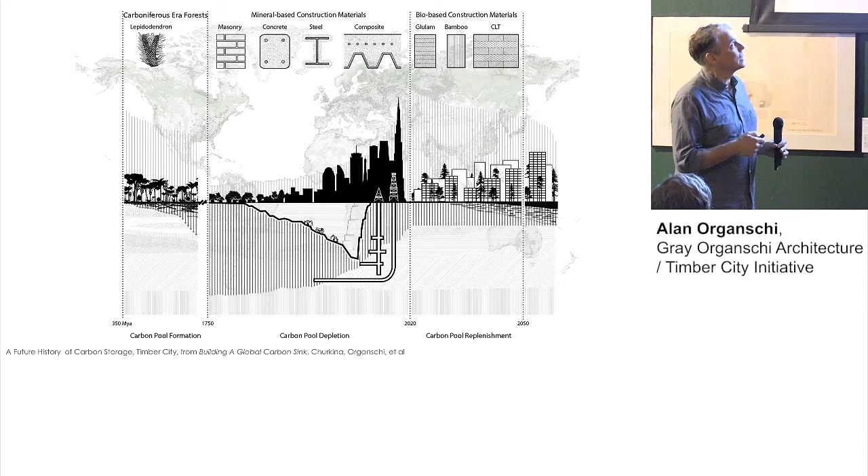And then finally, through a new set of kinds of assemblies that maybe we can use, again, carefully, to produce a new biospheric building, which relies largely on renewable resources as well as industrial waste streams.

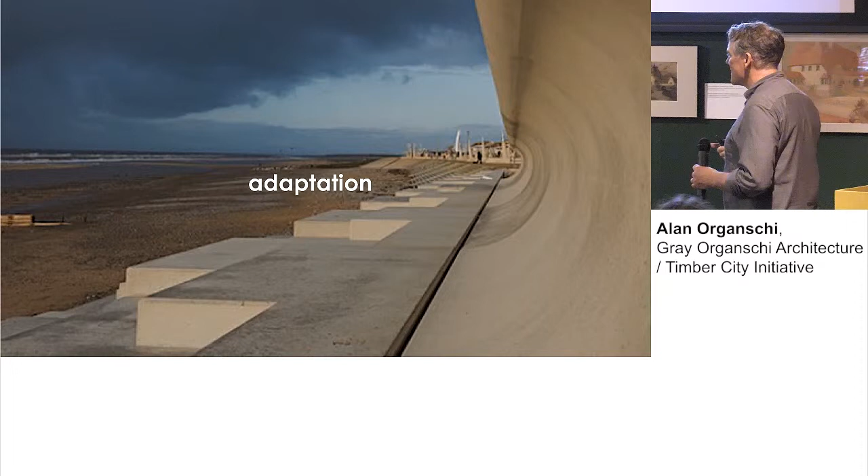And then the other option, which I think is less considered by architects and environmentalists, is that the built environment could mitigate climate change, which is what I'm talking about. And what does mitigation look like? It probably looks like a robust, sustainable forestry system, incentivized forest restoration and afforestation, growth of new forests. And it has a lot of great, hopefully pleasing wood architecture in beautiful convivial densities like Helsinki.